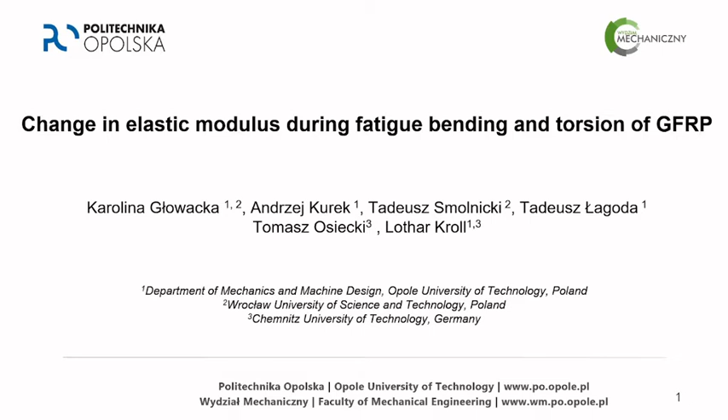The topic of this presentation is change in elastic modulus during fatigue bending and torsion of glass fiber reinforced polymer. The research was carried out by 3 universities, 2 from Poland, which are Opole University of Technology and Wrocław University of Science and Technology, and from the German side we had Chemnitz University of Technology in our international cooperation.

Preparing a short background like the literature review, we know that when we determine the fatigue characteristics, especially the strain ones, it's necessary to know the elastic modulus in case of bending or tension compression, or shear modulus when we think about torsion. In general, in the classic propositions, the elastic modulus is assumed to be the same one as the one used in the statics.

We assume that there is no change during the fatigue bending, for example, the modulus doesn't change. Of course, when the microcrack appears, the modulus decreases. We know about it, however, it's the subject of separate observations. However, everything said until now is still talking about isotropic materials. In this presentation, we would like to talk about composite materials, which sometimes behave completely different to the isotropic ones. Let's take a look at those equations at the bottom of this page.

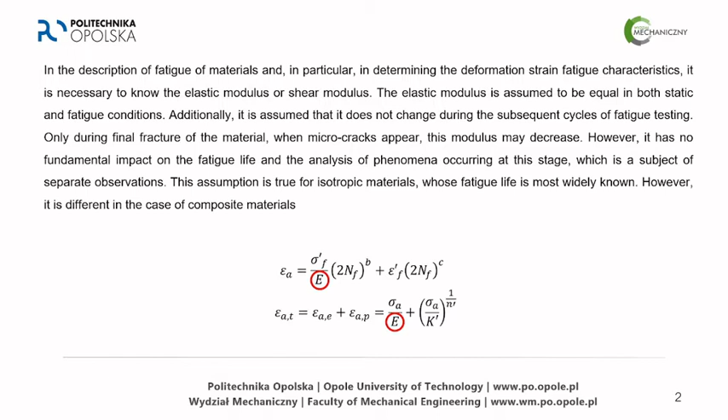The first one is Manson-Coffin-Basquin, and the second one is Ramberg-Osgood, which are the basic equations we use when we analyze the fatigue of materials. In those equations, those two moduli, which are now in red circles, are constant and the same as in the statics. However, some researchers found out that it's not a good idea to use the constant modulus for composite materials. So they suggested that we could use a dynamic value which changes when the cycles increase.

Here at the top of this page, we can see the equation for this dynamic Young modulus. When we analyze the degree of damage, there are 2 propositions at the bottom of this page, from 2 different articles. As you can see, we use the dynamic modulus. Here E0 is the Young modulus at the beginning, and E as a function of n depends on the number of cycles. And EF is the Young modulus at the moment when the material damages.

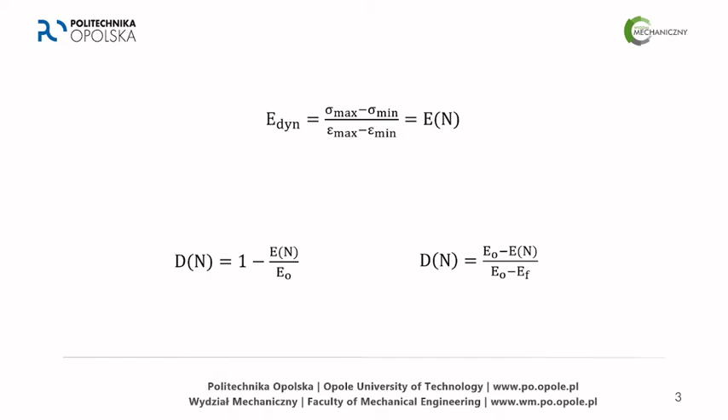As you can see here, there are very different ways. The first one was just a proposition, and here we can see another 6 possibilities how to determine this changing dynamic Young modulus. There are 2 things which we could say. First, they come just from tension compression, not from bending, not from torsion. And the second thing is that they are so different that it's hard to say which is the best.

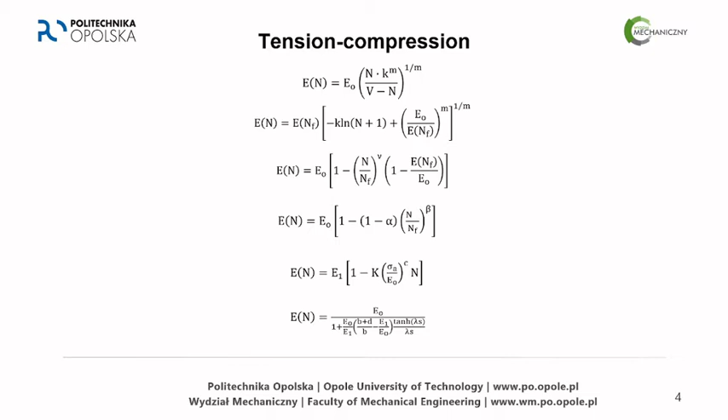And of course, composite materials is such a wide topic. We can have different reinforcement, different materials, different percentage of reinforcement, for example. Depending on which material we use, perhaps we could use another proposition.

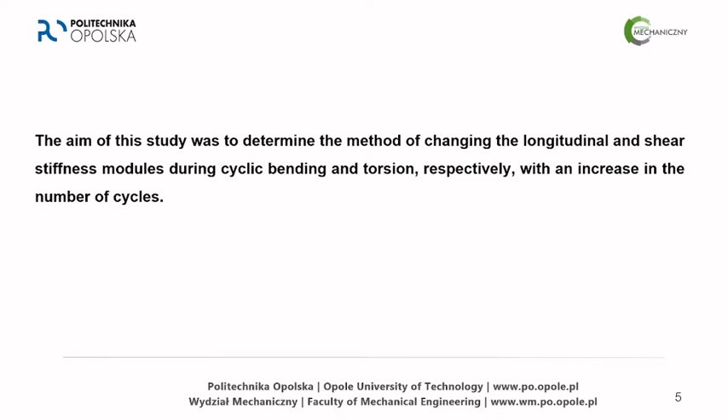So, summing up the literature review, the aim of this study is to determine the method of changing the longitudinal and shear stiffness modulus during cyclic bending and torsion, with an increase in the number of cycles, which is different to the current ones, which were only for tension compression, and we didn't know which is the best one, so we are carrying on this research and looking for maybe a better solution, maybe not. We'll see in the future.

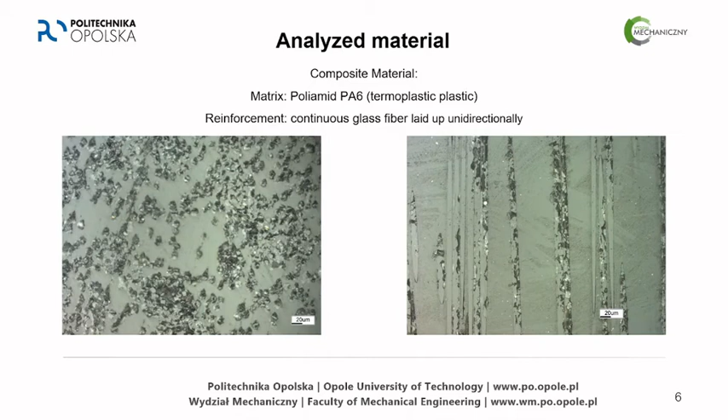For the analyzed material, it's not very important what exactly was the matrix or the reinforcement. What is most important is that these were continuous glass fibers laid up unidirectionally. These are two pictures of it. The one on the left shows us more about the material: the reinforcement is equally laid up in the material. Here we have some basic parameters. The density of the material is low, as is typical for composite materials.

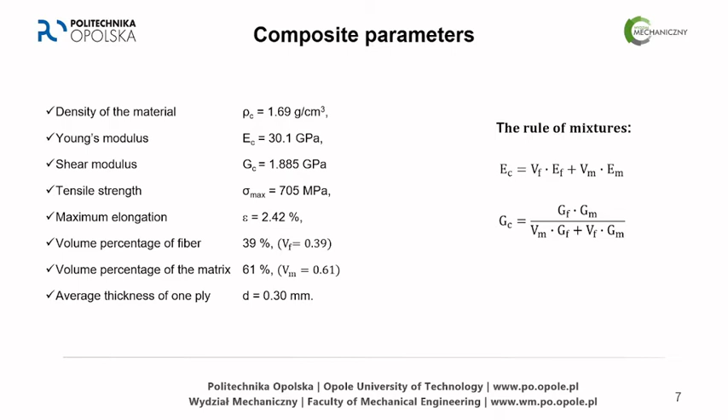From here, I would like you to see the second and the third lines, which is Young's modulus and shear modulus, which we're calculating based on the rule of mixtures, which is presented on the right of this page. As you can see, the value of the modulus in the composite depends on both modulus of both fibers and matrix. F is for fibers, M is for matrix, and also based on how much reinforcement we have. So based on it, we could assume a value of the Young and shear modulus in this composite.

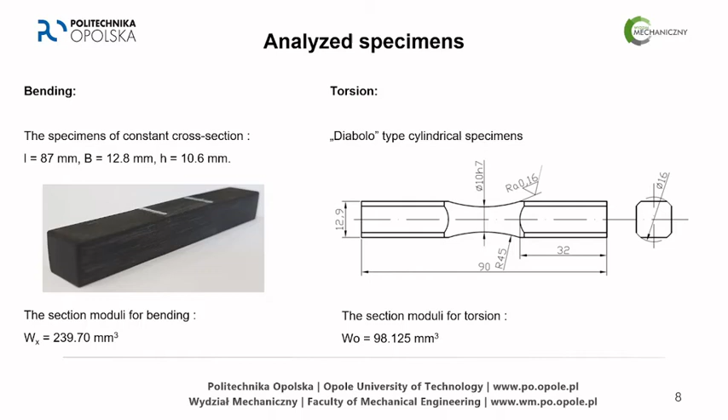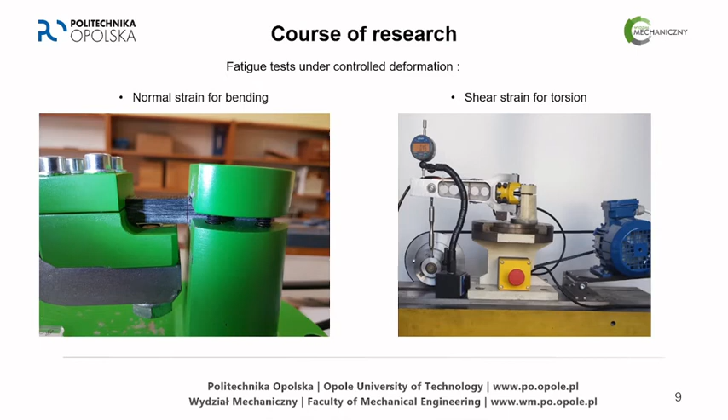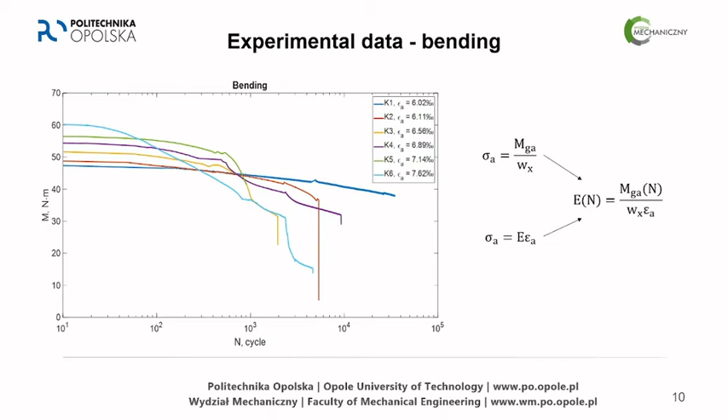Moving on to the experimental data, let's take a look at the graph presented on the left of this page. This is the bending moment as a function of number of cycles. What's interesting in this graph is that when the strain amplitude is low, then it doesn't change so much when the number of cycles increase. However, when the strain amplitude was the biggest at the beginning, it decreased so much that it was actually the lowest at the end. And on the right side of this page, we can see that based on the basic formulas from strength of materials, we can derive the formula for the Young modulus, which was used in the next stage of the research.

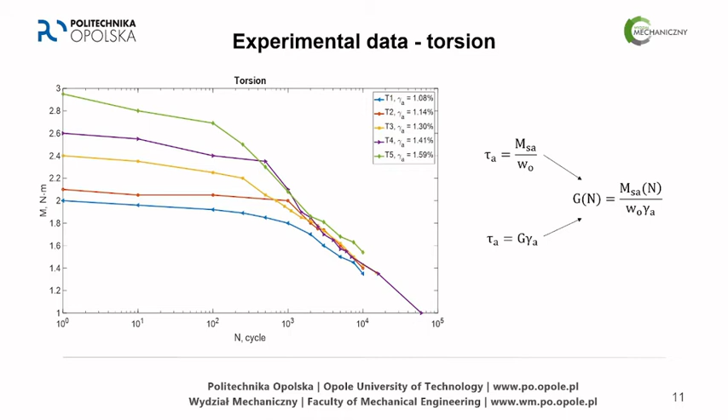And here you can see a very similar graph. However, here we have torque as a function of number of cycles, and here there's another very interesting fact, let's call it observation, that when we get to the 10,000 cycles, no matter what the strain amplitude is at the beginning, the torque is actually equal. And on the right of this page, you can see our formula suggestion for the shear modulus.

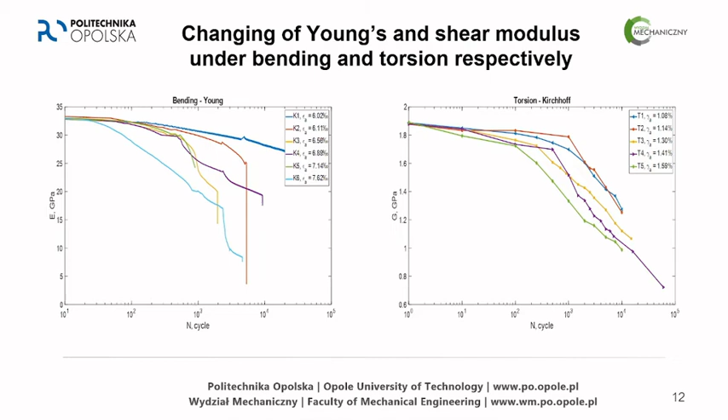Here are two graphs. They are very similar to the two graphs which were presented before. However, on the y-axis, you can see the Young modulus or shear modulus, depending on if we have bending or torsion. So the appearance of the graphs is similar. However, the values are totally different.

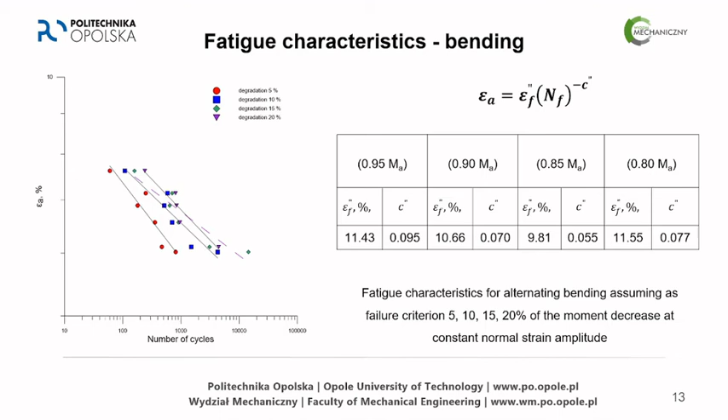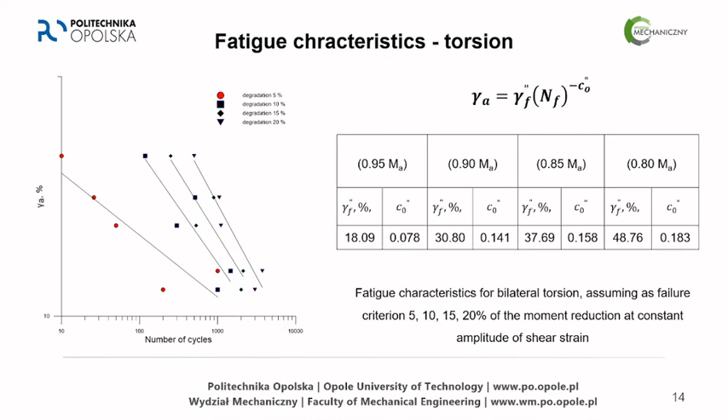Getting to the conclusions, we can see that first of all, based on the literature review, there are several propositions for fatigue in tension and compression of composite materials, how to use this, how the Young modulus changes. However, for bending, there were no propositions found, and for torsion, there was just one, so it's not much yet, actually.

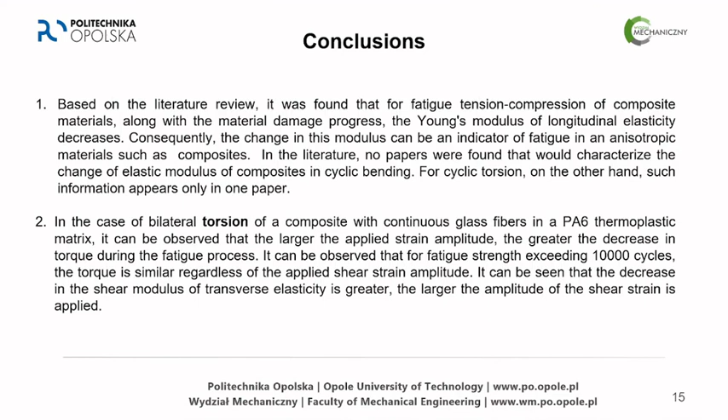The second conclusion is about torsion. It's worth saying which material it was. It was PA6 thermoplastic matrix with continuous glass fibers, but we hope that this way of thinking would also be true for other materials. For this material, we found out that no matter what the strain amplitude was, at the level of 10,000 cycles, we obtained almost the same torque. And in the case of bending, we found that when the strain was smaller, it decreased just a little bit. However, when the strain amplitude was bigger, it decreased rapidly.